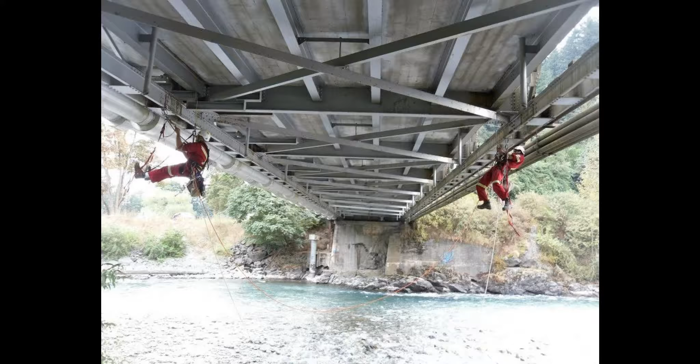Here's a picture of that's quintessential us at work. This bridge doesn't exist anymore. We inspected it and said it's so bad you need to get rid of it.

As an asterisk here, I'm not going to tell you where any of these bridges are. Every single bridge is going to remain anonymous. Obviously some clients would love us to tell you about the projects that went well, and other clients don't want us to tell you about the projects that didn't go well. So you might think you know where this bridge is, but I work in 50 states, 10 provinces, and 3 territories, so don't even try guessing. It is somewhere in North America, and you probably don't know where this is.

But anyways, that's kind of the more challenging bridge that we look at. Before you get to this stage, you start at this stage. I really don't want to spend thousands of dollars on plane tickets and get somebody to fly all the way to New York only to find out they're afraid of heights.

So I can tell you where this is. This is in Richmond. These are all guys, we go down there, and this guy here, he couldn't go any higher than that. And that's fine. That's totally fine. Now is the time for you to find out that you're afraid of heights.

So we get them there. Everyone's, of course, all in the harnesses. We're all ready to go. And if you can get up to that ladder, then you go up to that ladder, and then at the end, you graduate when you walk across that beam. You'll never have to do that in the actual world, but if you could do that fully strapped in, and you can walk across it and feel nice and comfortable, then I know you can climb a bridge.

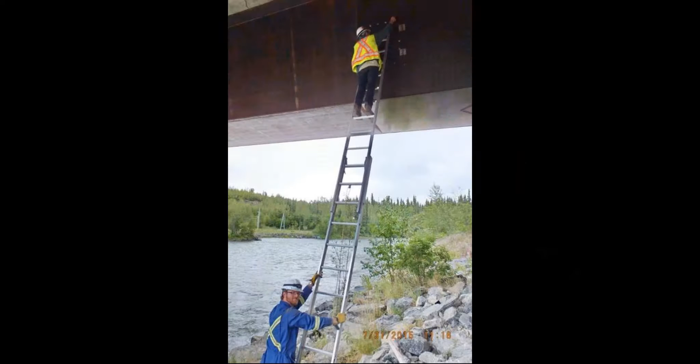So when we take you out to site, here's day one. Again, you have to be very comfortable at the top of the ladder. What's he doing there? He's loosening some bolts. So we're going to loosen the bolts on the trapezoidal box girder, and then we're going to go inside, and then we're going to close the door, and we have a gas meter with us because it's confined space.

We got to make sure we have the proper amount of oxygen with us, and we turn off our headlamps, and we make sure we have multiple flashlights with us, because when the one battery dies, you're not going to be able to find the other battery. And the reason why we turn off the lamps, we close our eyes and wait to adjust, and then we'll see little pinholes of light. Then we can see potentially where the holes are. And then of course we turn the light back on and we look for various different defects inside the box girder.

Now the ultimate graduation of heights, and I like playing this one. Can anyone see where the inspectors are? So we walk all the way along the suspension cable. You wouldn't be doing that - I would not graduate. That's totally fine. So as we're walking along, we're looking for various different defects that we see.

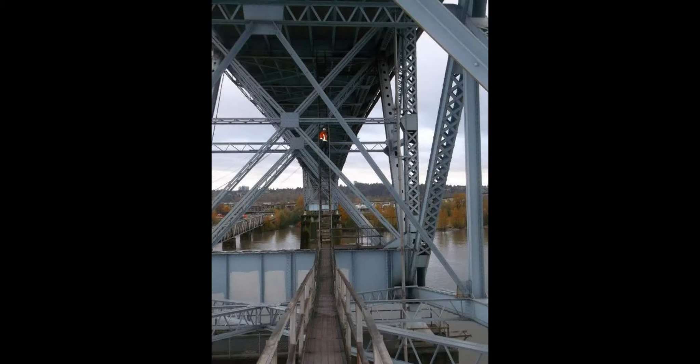This is a bridge here. It looks a little scarier than it is. The ladder I'm on is probably at like a 30-degree angle. It's not straight up and down.

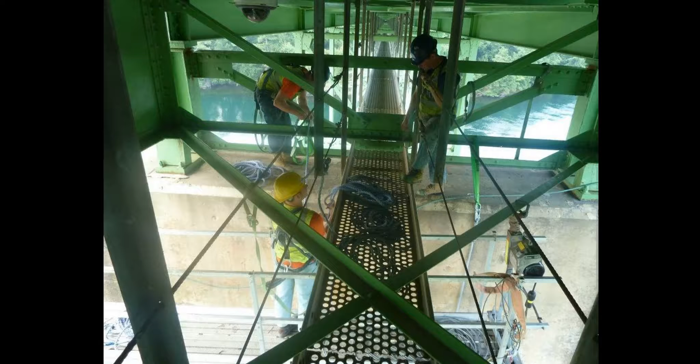And some of them, probably the easiest one is this one here. Some bridges, and it's great, and I say this to all the bridge designers, please put catwalks and actual sidewalks underneath your bridges. That's lovely, because you can walk along this, and it's nice and easy to walk along. Of course, it costs way more money, and in the P3 world, people necessarily don't want to spend more money to help a bridge inspector 20 years from now. But it is really nice when you show up to a bridge and it's basically just walking along a sidewalk.

What they have underneath here, we call this the Spider-Man machine, and there's little winches on either side, and it goes down, and you tighten up, and then it pulls you over, and then it tightens up again, and it keeps pulling you over. So you can kind of Spider-Man your way around the entire bridge.

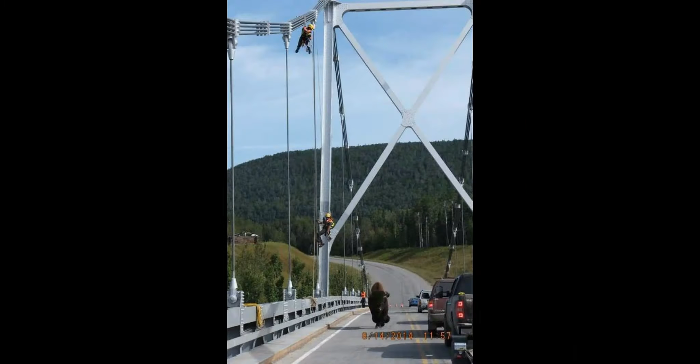So here we are inspecting some of the top cables here, and people normally notice the cables, they look down, and then that's a buffalo.

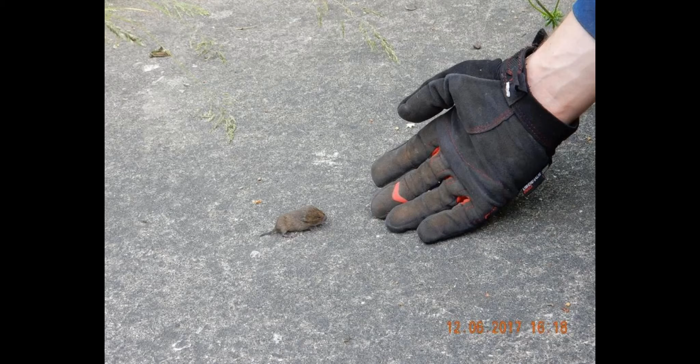I didn't have rattlesnake on my hazard assessment list until this happened. And so yes, we're not only looking up at the bridge, we also have to look down at our feet because there are rattlesnakes where we do inspections.

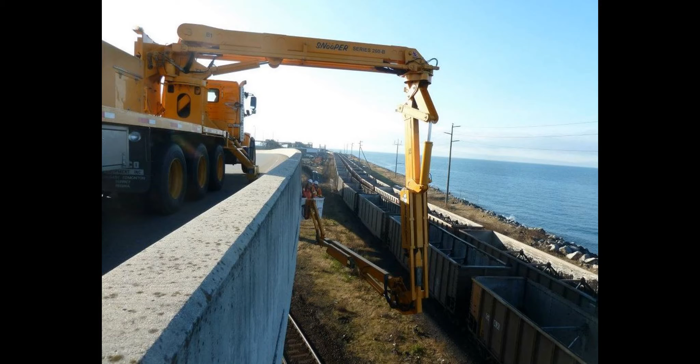The main mode of inspecting, we use this vehicle here. It's called a snooper truck. Snooper trucks are great because they usually only take up one lane of traffic, and then you can go right underneath the bridge. You can do it under active traffic. Here there were active trains moving. There's not a lot of envelope that they take up, so snooper trucks are great.

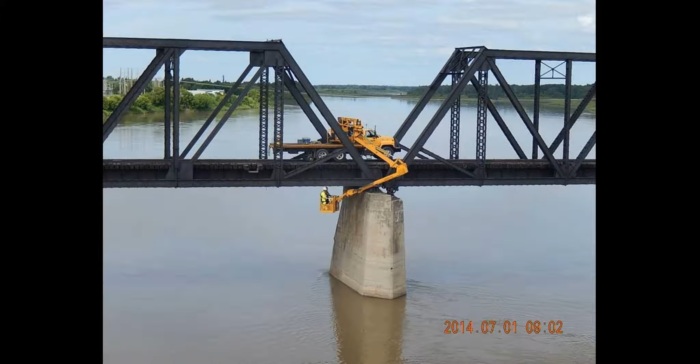There are only a very few of them in North America, so they are kind of hard to rent. You have to rent them well in advance. So there's one of the snooper trucks we use. I only know of one snooper truck that has railway capability, and this is the one that we use when we're inspecting bridges in Manitoba.

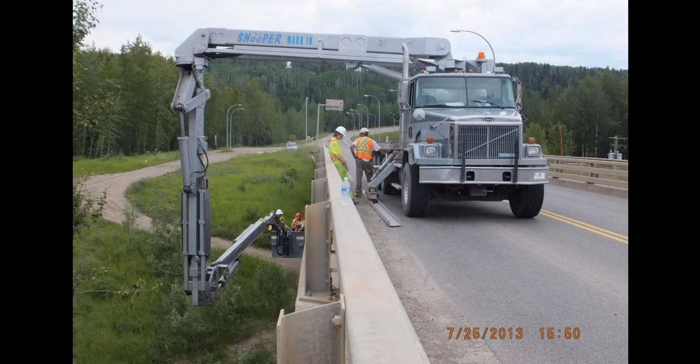And here's a bridge, this is up north, again a bit of a different configuration. Some of them, like you can see, this one has a very small box. The advantage of that is you can get right into a tight little area, but the disadvantage is if you're going back and forth looking at different parts of the pier, that becomes annoying because you have to keep moving the arm. So you kind of have to think ahead about the various constraints and what you're going to be looking for.

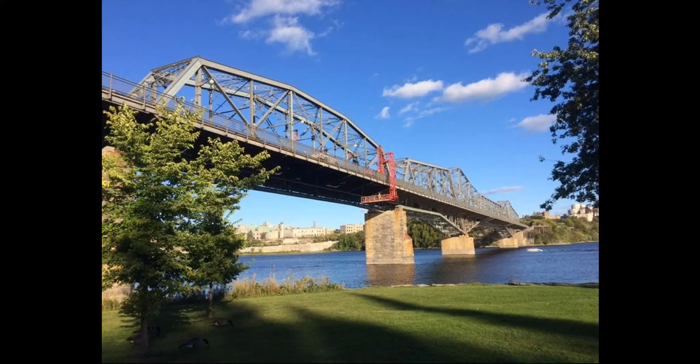So you show this one. This one's in Ottawa, so the Parliament Buildings are right over there, and you might recognize this bridge - Justin Trudeau has done a lot of his photogenic jogs across it, so this is the iconic Alexandra Bridge. For this, you can see the size of our platform there.

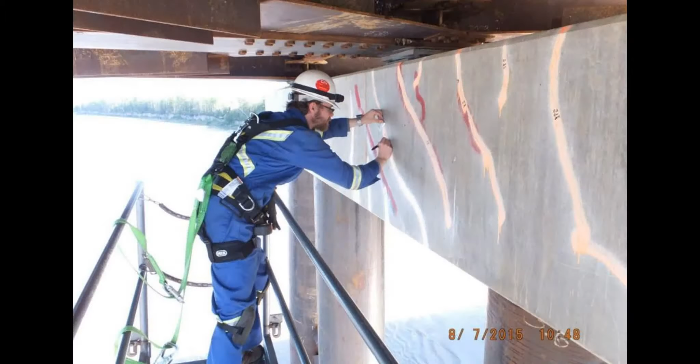So this is back at that same one - concrete related. While we're down there, I am measuring the cracks. So every year I spray paint. We go back to the same bridge, and I spray paint all of the cracks, and if you were to zoom out, you'd see that the cracks in this concrete perfectly match exactly where the cracks should be when you have 4 piers like this and 3 beams like this. It's not the greatest design - I would have 4 piers like that and 4 girders like that, so the force transfer is direct, and because of that we have all these diagonal cracks happening.

So every year I spray paint it again, and then I take out just a little crack gauge, and we're graphing how the cracks are getting larger and larger, and then eventually if the cracks get too big, we'll put a collar on the outside of the hole here.

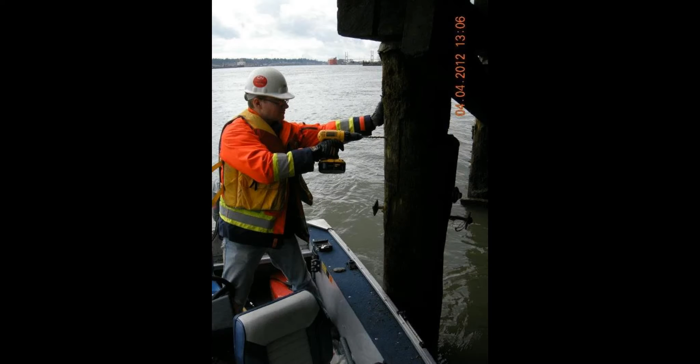We also use boats to get to bridges, so we do lots of timber borehole testing. And if the water is nice and calm, I have a fly fishing tube. So sometimes while I'm at work, I'll be in all my proper PPE, and teenagers will just flow past me in their tubes - exact same type of water situation.

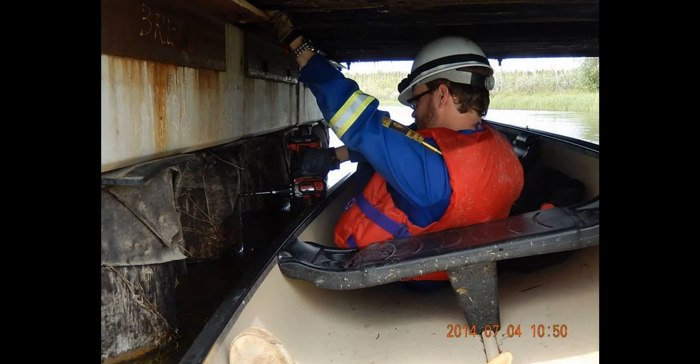When the water is a little bit more rough, here we have a little inflatable raft that we were doing inspections in. When we have to get into low profile areas, here's a canoe. We were doing timber drill testing up in Manitoba on a bunch of railway bridges.

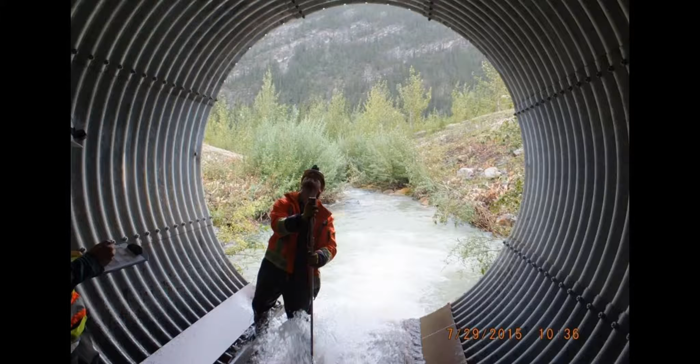We've inspected all of the culverts on the Alaska Highway. So when you're driving, if you ever just suddenly notice a railing and then the railing goes away, if you stopped and looked out and under, there's probably a big, large culvert there. And if you're driving the Alaska Highway, you're probably driving in the summertime - these are usually either completely dry or just a little bit of water coming through them.

But then they have a thing called freshet - so when all of the snow melts, these almost get completely filled. We have to make sure that they are not plugging up, because obviously you could sever the one line that goes up to northern Canada. So it's very important they get inspected every second year by either us or another engineering company, and then on the odd years they get inspected by Public Works as well.

So I went into the outlet, I walked through it, and when I got to the other side, I popped up into his giant compound, and his security guy came over, and he was just blown away, like, this is the best security in Vancouver, how on earth did you get in here? And I said, well, I'm working for the city, and we just crawled through the pipe. So they put a gate on it the next day, because it's a pretty glaring security hole, which is fine. They had to clear it with us because there's a certain spacing of the bars, because you don't want that to plug up, and that would flood his property.

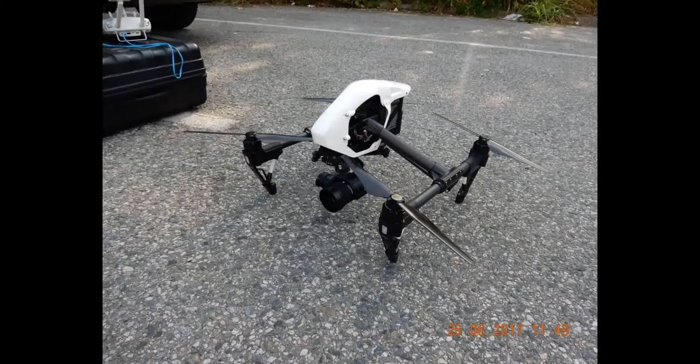We use drones to inspect bridges. This is in the Port of Vancouver. The port doesn't want to shut down anything for a man lift, or shut down the railway tracks, but with a drone you can get right up there and look right in the bearing.

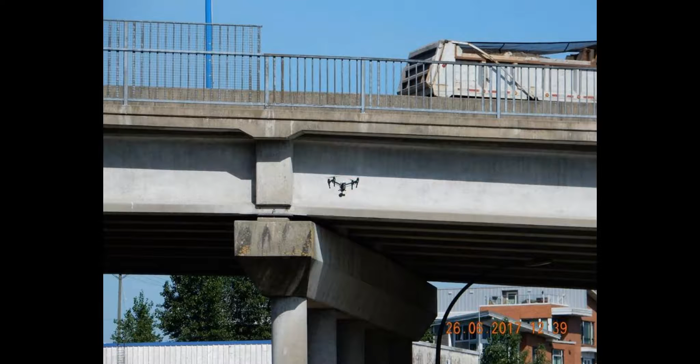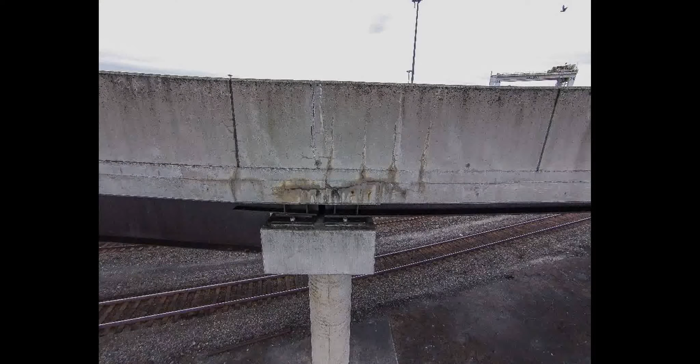This is another job. I can mention the client because this project went well. This is in the port. Again, there's no way we could get that photo. If I zoom out, we're right over top of active trains. You can't even get a man in there. We looked at the midway joint here, and the drawings didn't make sense until we started to see this joint.

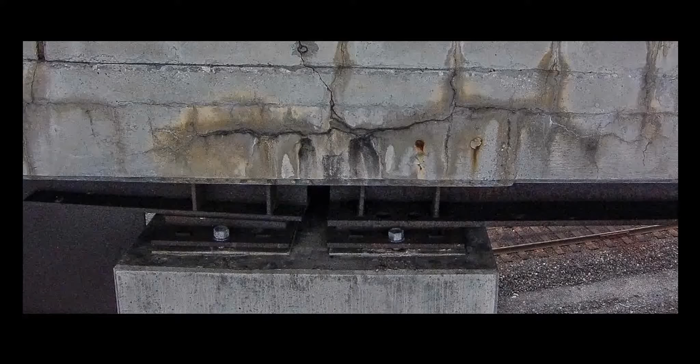This was a job Malcolm was working on. As we zoomed in, because we have a good 4K camera, it was a lot more evident where things were breaking, and it totally made sense to the designers about how we were going to fix this. I think we ended up putting in a link slab.

So I don't look at my job as a bridge designer. I look at my job as a bridge inspector. I'm taking the photos, giving them to Matthias, giving them to the designers. They sometimes say go back, take more photos. But they were super happy with this photo, and I said, great, I'm a glorified photographer. If you guys are happy with the photos I took, I'm happy.

This was a job down in Delta, where basically this retaining wall was falling into the stairway. From a constructability point of view, I put this in. How do you drill in? How do you get your drill rig in here when the sidewalk is only a few feet wide and it's all on a big angle?

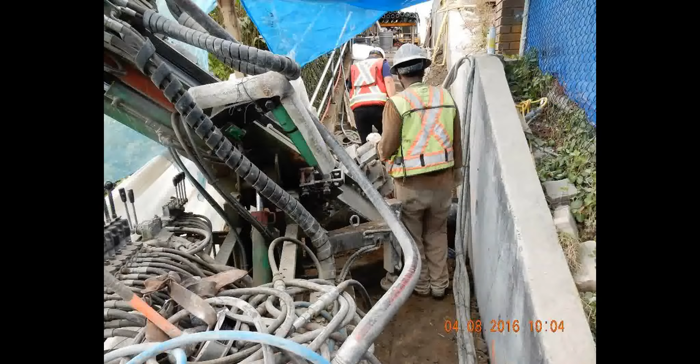I kind of hate to give away secrets to our competitors, but it's okay, I'm okay with doing that. Basically we did kind of an Egyptian style - took a bunch of blocks of styrofoam, which only weighs a few pounds, and put it on the various different stairs to create a flat platform. We got our full drill rig perfectly right in there in order to drill in all of our anchors.

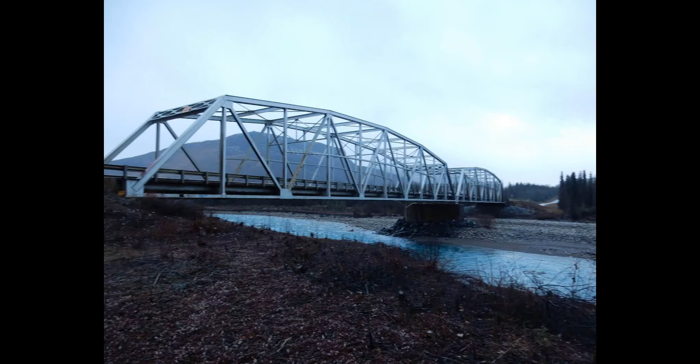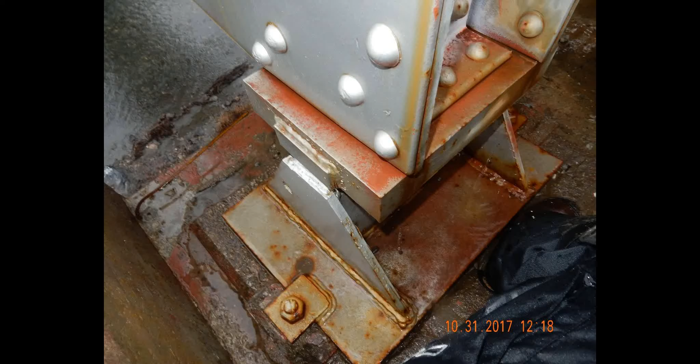How do I explain this? The bearings - this is the bearing, so let's go back to the bridge. Here's the bearing, and this is the end post that comes down, and the bearing. Here's the I-beam, and the bearing is pinching the inside of the web. So as the bridge is moving back and forth, it's basically just ripping the web right out of the I-beam.

I'll show that on a different angle here. You can understand, they didn't fix it to the flanges, they fixed it to the web. When I came in and showed this to the client, I actually took a piece of paper and got them to pinch the middle, and it just rips. So obviously you're going to have a crack right there.

And we tracked those cracks for a number of years, and we saw that they were continuing to develop more and more, and eventually it'll just completely rip the web right out, and then the bridge will fall down 2 feet. It won't be a catastrophic collapse of the whole bridge, but it will certainly shut the Alaska Highway down if you suddenly have a 2-foot drop on your bridge.

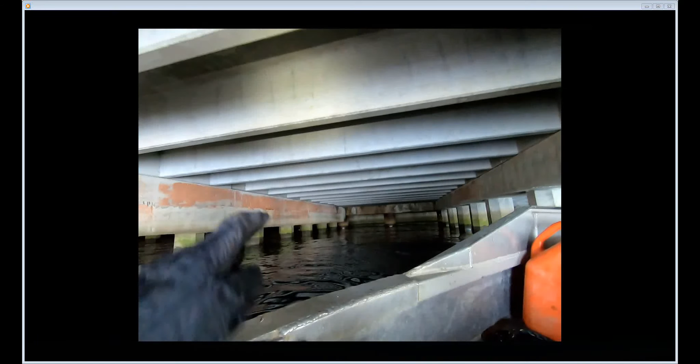So I start with this video. I'll play it a couple times. All these videos are quick videos. This kind of shows you what good looks like. So there's a good idea that if you want to know what bad looks like, you need to see good a few times. So I'm going to show it once.

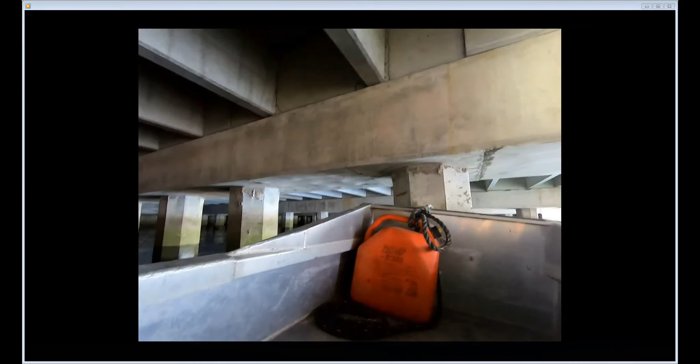Okay, show it again. You know, obviously you can see where the formwork was. You can see the water lines. There's a couple cracks here and there. Okay, so that is okay.

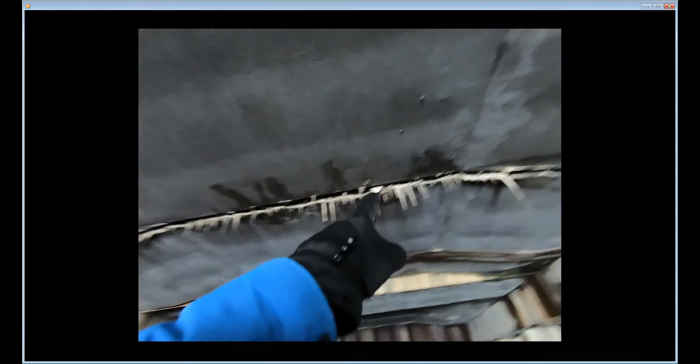So now let's see the very next, and this is only a few feet away. This is the exact same structure, only just a few bays away. It was built by a different contractor. So really a lot of it just comes down to poor workmanship. The first thing I noticed, they left a lot of their formwork right on site. They didn't even clean up their actual work. And then all of the joints are also leaking, and all of the joints here are leaking as well.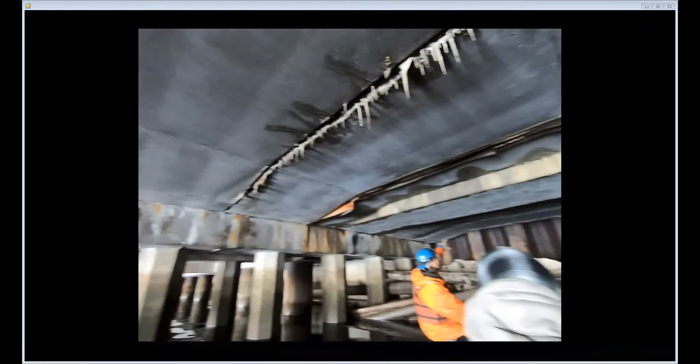And this was the first bay. We had about 40 bays to look at. And so this is the end beam, and you can see there's just a lot of rust staining coming down at all the end beams. So if you see a problem, there's a pretty good chance that there's a much deeper problem buried somewhere inside that structure. So this started to get me a little bit concerned.

Okay, this is just the first one. Like, how much worse does this get? So I'll show you what happened in this next one. So we went to the next bay.

Kind of hard to see in the video, but the corrosion here, this is supposed to be a flat face, but it's eaten it away by about 1 inch. And we're starting to actually expose some of the rebar here as well. So again, my job is to find the problems. I'm not afraid of heights, I'm not afraid of crawling through bird poop. I mean, my job is to find the problem, measure the problem, hand it off to Matthias and his team, and then they tell us how bad this necessarily is.

So I do all the measurements here, and then we have load raters and various different designers who can then say, well, the factor of safety, it was way over designed, so I think we're okay. Sometimes that doesn't happen. Sometimes they say it was designed right at the line, and you've had some deterioration, so we need to potentially shut this structure down. So this obviously was raising quite a lot of alarm bells for me.

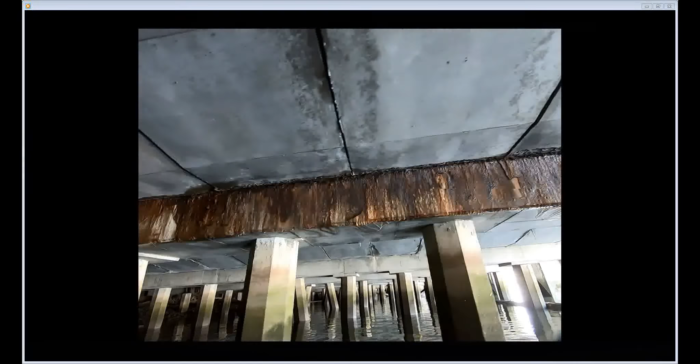And another thing, you can notice here how bad it is, and then you look into the other bay, and it's not as bad. So what's the root cause here? Well, there's a joint in the structure here. There's a joint here, and there's no joint here. And a lot of times, Matthias introduces me as the guy who teaches us what not to do, which is kind of seen as an insult, but that's not what he means as an insult. He means I see what designers shouldn't be doing.

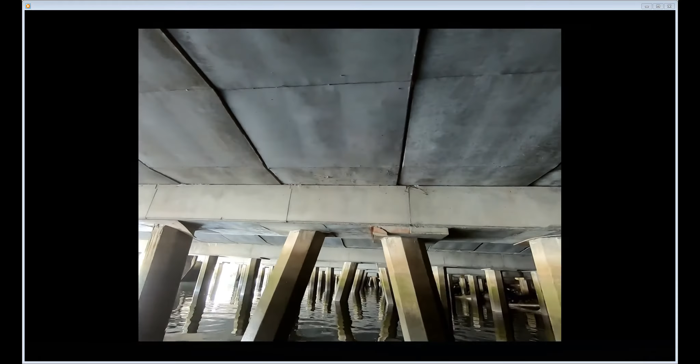So I go back to the office and I say, guys, figure out your joints. You need to do joints properly because water absolutely kills concrete. It's so terrible for concrete. You need to get the designers on board to make sure we're flushing water away from the structure. There's no joint here, and that looks fine. There's some formwork that I left in. And there's a joint here, which hasn't been dealt with properly. And you can see, this is the external deterioration. We don't know what's going on inside where that water might be pooling up.

So as I got to the end of the bend here, I had 60 or 70 or so to go through, and I was starting to get a little complacent because they all started to look the same. And that's a problem with inspectors. We need to make sure we do a thorough job and don't get tired at the end of the day.

I started to notice something right here, and I thought, you know what, I need to get out of my boat. So I got out, and we always wear gum boots so we can get our feet dirty and wet.

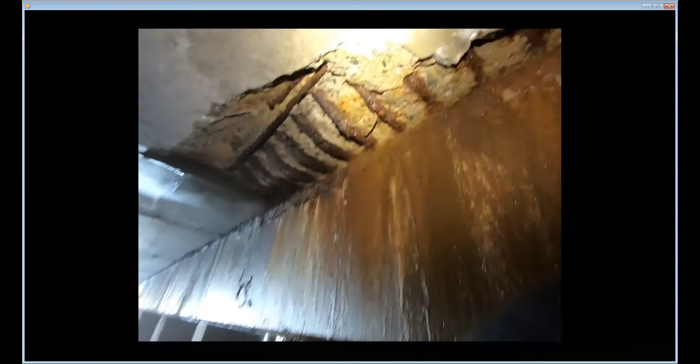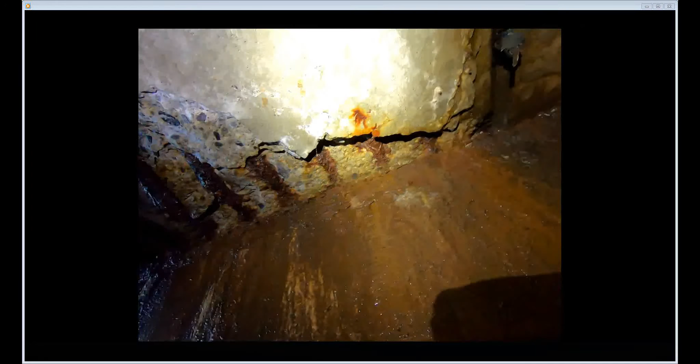So here I am standing on the shore, and this is the main load carrying beam of the bridge, the crane above us. These rebars are supposed to be straight and supposed to be in concrete. We looked at the design drawings and counted, and every single one—like that's the best one you got right there, and obviously even that one's completely debonded, and they're not supposed to be bent like that. You look right in there, and you can see shear is highest right at the end, and this is shear popping it right out, bending all the rebars right up.

So, okay, how's the other side looking? Because when there's pop on one side, how's the other side? The other side looks okay, but if the problem's happening there, the problem might be happening on the other side as well.

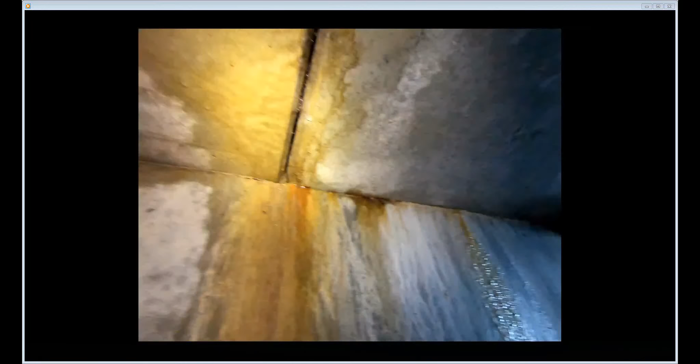Pause it right there, yeah, right about there. So this was a situation where we shut it down. We told the client, you cannot safely operate on this. We've done our calculations where even in new condition, you probably shouldn't be operating these larger capacity cranes. So that is an interesting battle there, but as far as we know, they've shut it down. As far as we know.

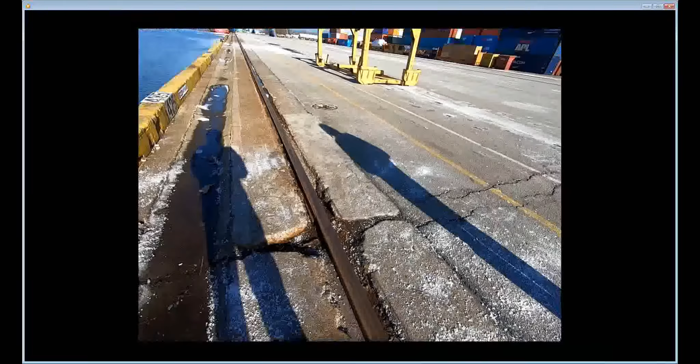So the root of the problem here—what's all the white stuff on the ground? It's salt. Salt is terrible for concrete. And here's the joint, or lack thereof, of a joint. So again, we say to designers, when you're designing a joint, actually design a joint, because the force is going to find a way. It's somehow going to find a way. It's broken the asphalt, the water's still going through, and it's still eating away at the bridge, at the structure.

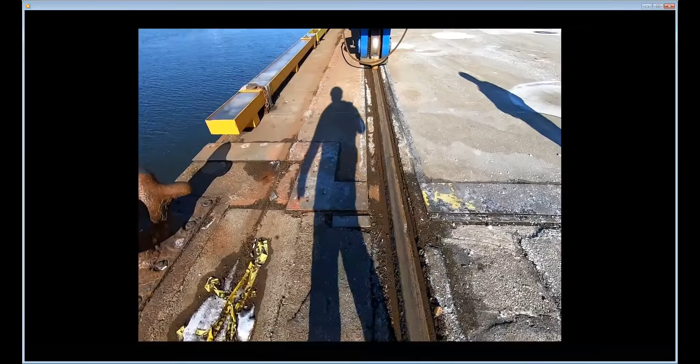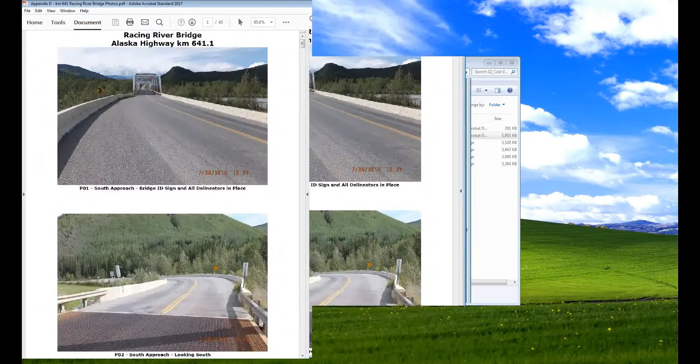Perfect, right on time here. So this is the same bridge that we saw before. Let's scroll through some of the photos just so you're familiar with the bridge. It was a truss bridge up on the Alaska Highway.

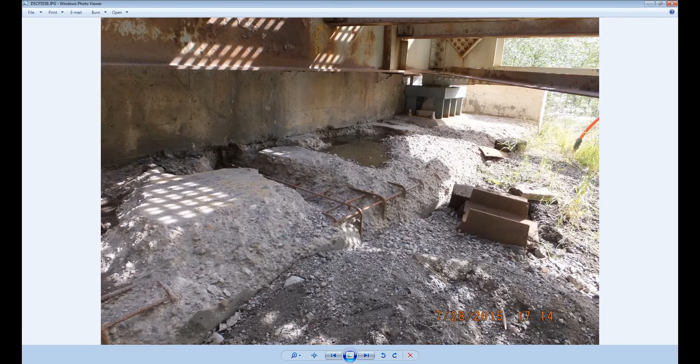And so here's a deck, a grated deck. So where does the water go? Where does the salt go? Where does the snow go? It goes right through the deck. And what happens is to the abutments—the concrete has spalled away about 8 inches, and we're down to the 3rd layer of rebar.

So this whole thing just gets completely covered in gravel, and the gravel holds in all the moisture. Again, I always say to people doing maintenance on a bridge, clear the gravel away from a bridge, because the gravel holds all the moisture, it holds all the salt, it holds all the sand, and it completely eats right away.

Happy to say this has been completely fixed. We were fixing it just a couple weeks ago, and this is the same bridge where we were fixing and swapping out the bearings.

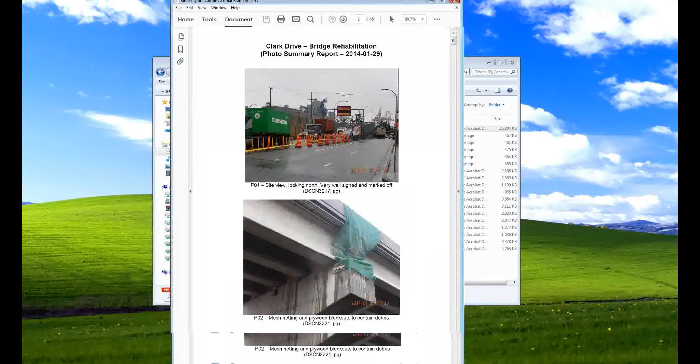Here's a joint repair I want to show you. The client was the Port of Vancouver, and they were quite happy with how this one went.

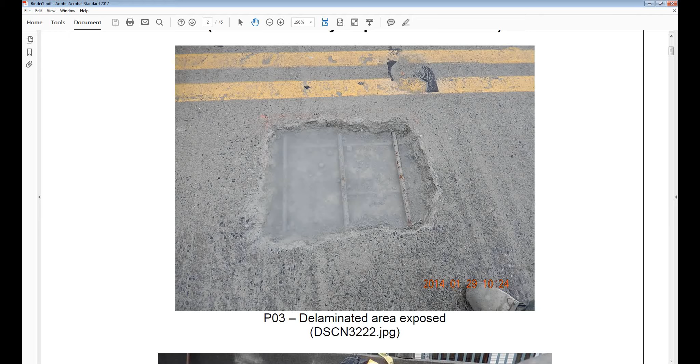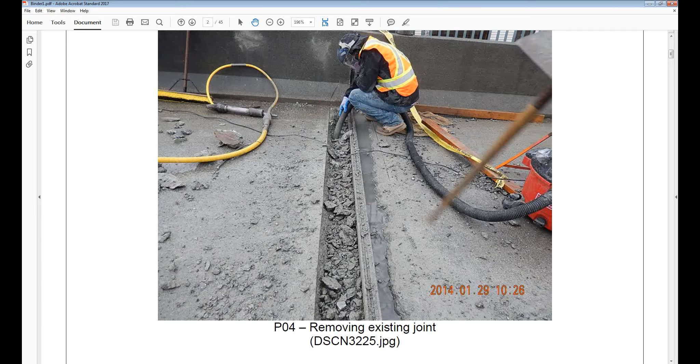We're probably all familiar with concrete delam. A lesson learned here: make sure you don't just jackhammer out the area of delam, go quite a bit beyond it. We did this job back in 2014 and had to do it again because we didn't go far enough out, so that's kind of on us. We needed to go a little bit more. Also, delam patches a lot of times don't work so well, and they don't necessarily have the same life expectancy as fresh concrete.

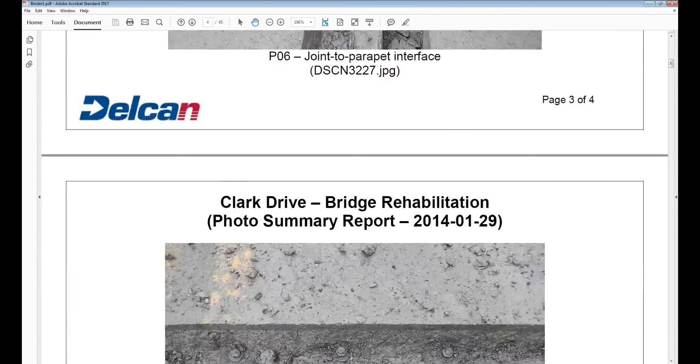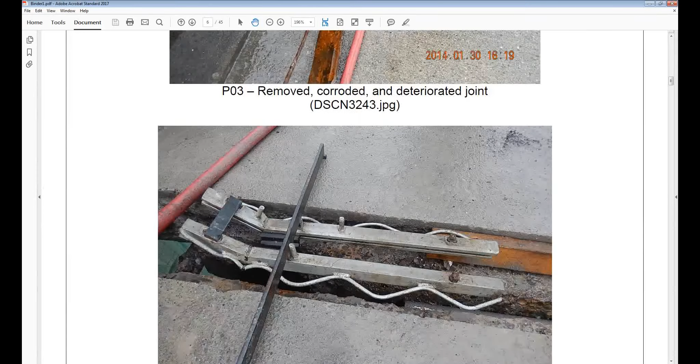The job here wasn't so much the delam patches, it was the joints. The joints were leaking and deteriorating the girders underneath. So we jackhammered out and pulled out the old expansion joint, cleaned it all out, and removed everything from the joint.

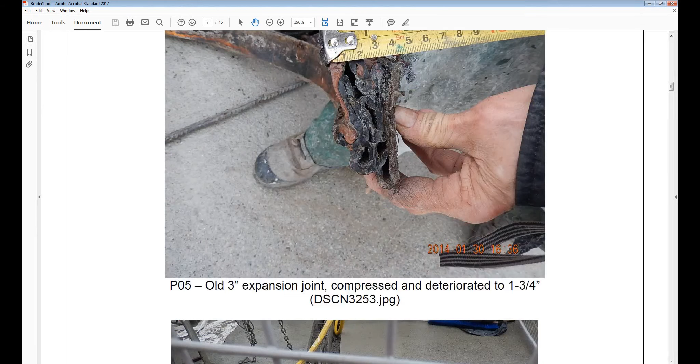Some of the old joints we were breaking out, and here's the new joint we were putting in. It's a sinusoidal bar, and we were going to put in a product I highly recommend called Wabocrete. There's an example of the old joint, which was all destroyed.

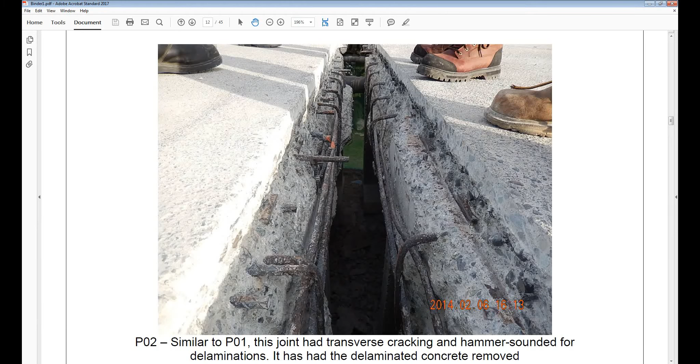Some other site photos here. We started forming up where we were going to put in the new joint. Again, here's an issue where the concrete was starting to deteriorate, so go back a number of inches past the actual point of deterioration and clean it all out.

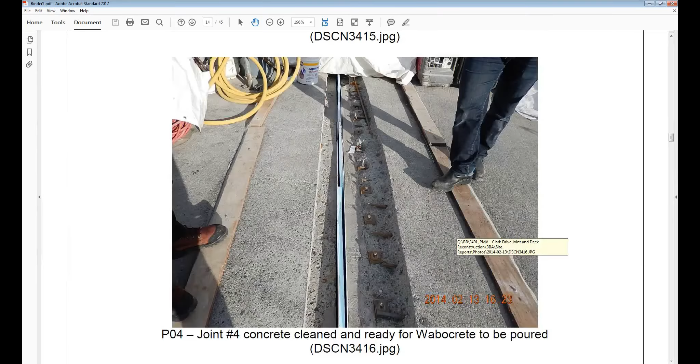The rebar that we exposed chipping away the concrete was not normally deformed, it was just smooth bar, so we had to put in new rebar. There's some more rebar exposed, and it started to form up in the middle.

Some more forms on it, and then we put in some of the new rebar. We start putting in patching material down on the bottom.

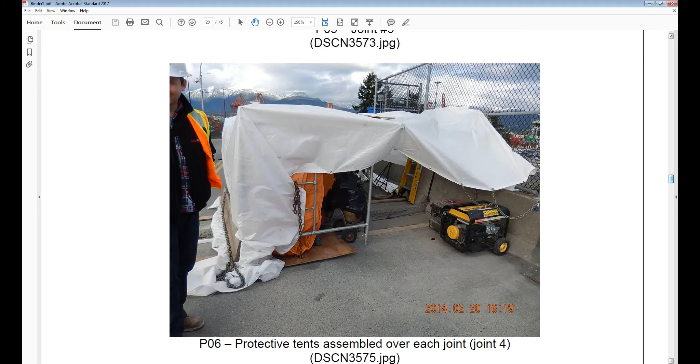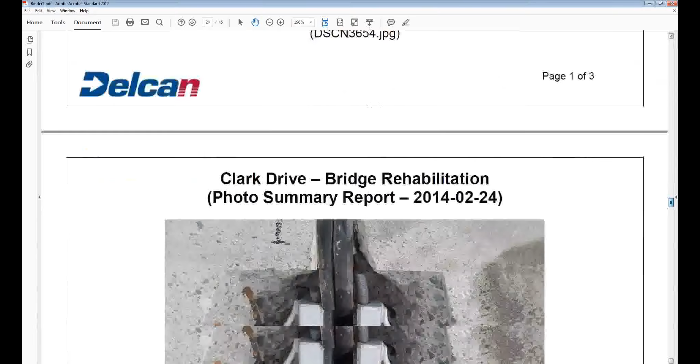Heating and hoarding, protective tents - it's always great to work when it's not raining and when you don't have the wind blowing against you. It's also a lot nicer for the contractors, they stay nice and warm, so a happy contractor is a productive contractor. I really recommend putting in the specs to make sure you put a little tent around the areas you're fixing. Then as we got towards the end, we started to pour.

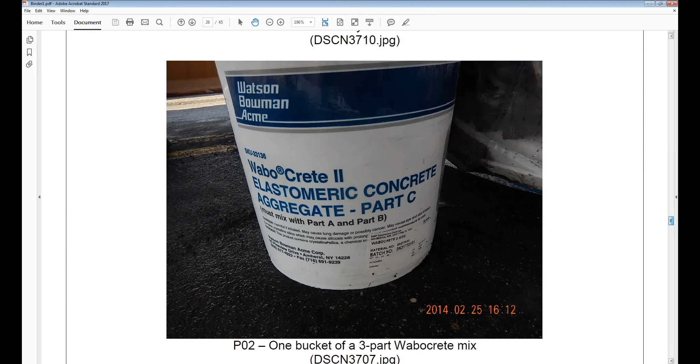There's the sinusoidal anchors, the tents, and there it is fully formed up with the bars. I really recommend this product, Watson Bowman Acme, Wabo Crete II - a really good product to use.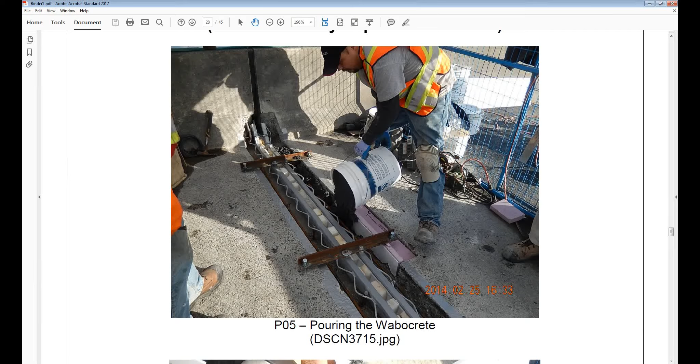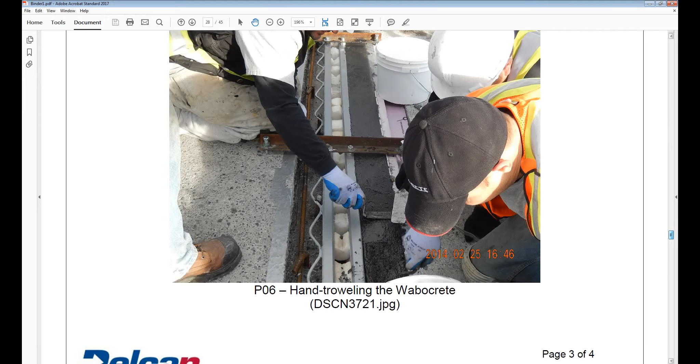It's kind of a multi-step process, you mix it in with these different pellets, and then it pours basically. The only bad thing about it is the bridge was on an angle, and the Wabocrete kept slowly falling down, so we had to get guys with trowels every couple minutes to push it back up, but that's okay - if that's all it takes. It's a great product, it sets up in a couple hours.

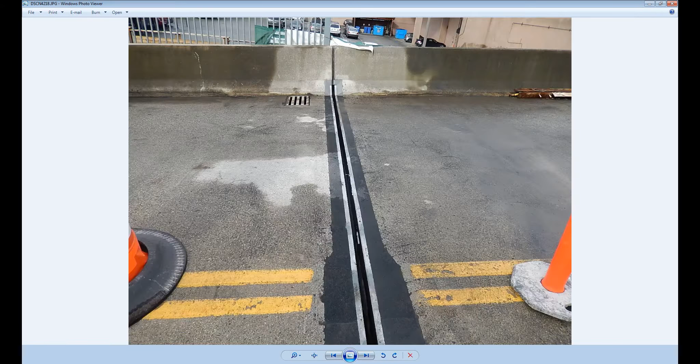That's kind of what the finished joint looks like. I'll snap to the photos here - I believe this is the final product. So it creates a nice look, it almost has an asphalt type look.

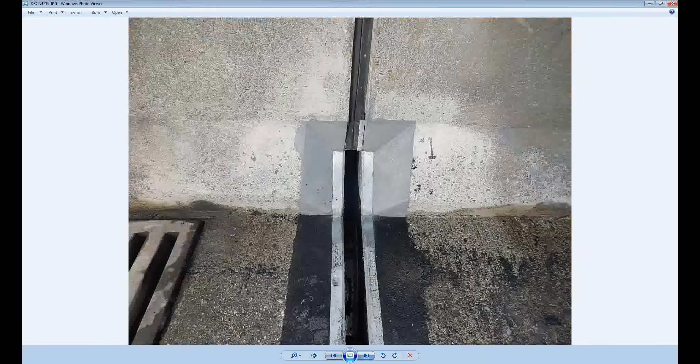Again, we wanted to think about drainage, think about relief here, think about how we're getting the water away from the joint. These are the patches that we finished, and these are also some patches that we did to the girder underneath.

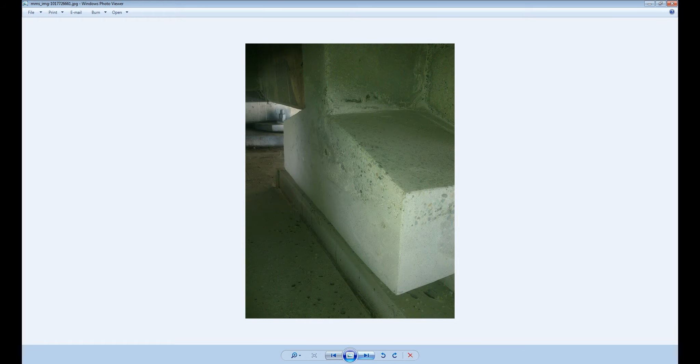We hilted in some anchor bolts to then put on these patches so they had something to adhere to. A lot of times I see patches that don't have anchors like this, and so when you put on your patch it just snaps right off.

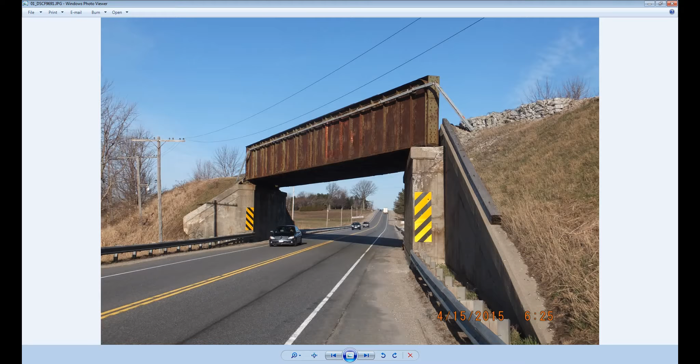I think we have just 2 more minutes here, so I want to think about the best one to show you. I want to show you this one - yeah, so I have 2 folders here, fixed and original. So original.

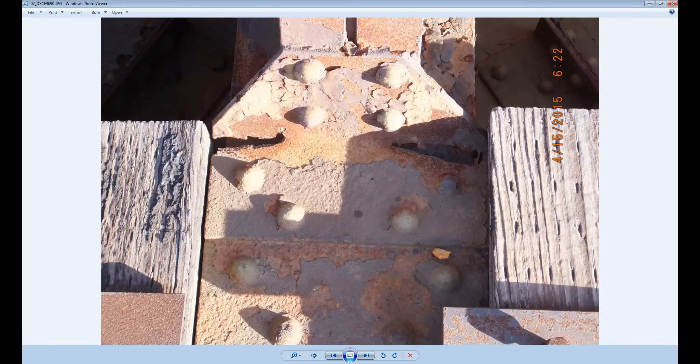Yeah, this is a train bridge. At first glance it looks okay, bit of a hump on the approach there. Again, nothing's really jumping out to me. Okay, concrete showing its age - I mean, it's 1936.

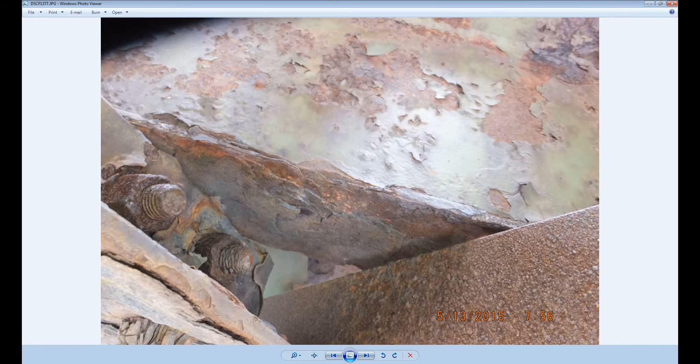Okay, that looks pretty rusty. Start to see cracks in the steel - if you see one crack in one place, you're going to see one some other place as well. So we're losing all the heads of our rivets here, and you see we even have a hole in the web. So if we have a hole in the web, that doesn't mean the web right here is full thickness - obviously it's knife edged right down to a hole.

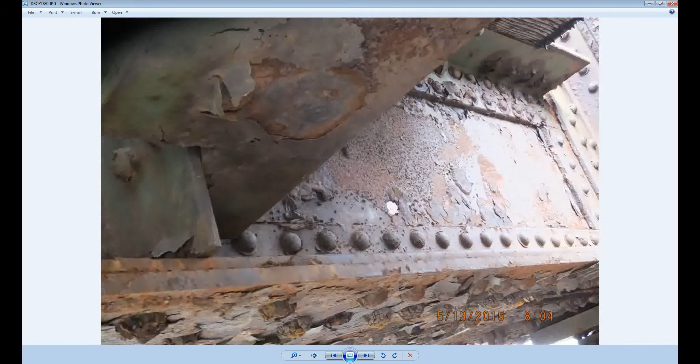Okay, we see more knife edging. It's really hard to measure with calipers the thickness of that, so I spend a lot of time up there with a wire brush.

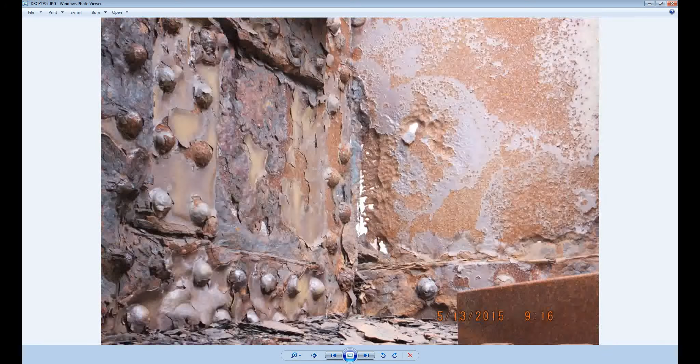More holes in the web. I'm starting to get a little bit more concerned. Now we have holes and perforations right along the web, getting worse, more holes. Right along, all the rivet heads are gone. This is the main girder, and you can see it's perforated right along here. More holes, more holes. That web doesn't have much left. Neither does that one.

This is a hole, now I'll show you at a different angle. That's the same place, so this is the main beam. There's no redundancy in this system. If that goes, the bridge falls down. There's no redundancy. And if you do your calculations and your section modulus, you've got a top flange, a bottom flange, and then you've got nothing. So from a math point of view, this doesn't even stand up. Obviously it is still standing up. So basically the load finds a way somehow, but this bridge should be shut down.

So we did, we shut this bridge down. We said you cannot run VIA Rail passenger trains at 70 miles an hour, which is what they were trying to do with that. So the emergency got some fixes going, and I will show you the fixes.

So you can see we replaced all the floor beams, or at least the worst floor beams. I mean, some of them might have been rusty, but not in horrible shape. You can see some of the floor beams over here were replaced. More floor beams, more floor beams. The web all in here, you can see the brand new bolts. We looked at every single stringer and which ones should be fixed, which ones shouldn't be fixed. We replaced the bearings, and that kind of overall shows what we did.

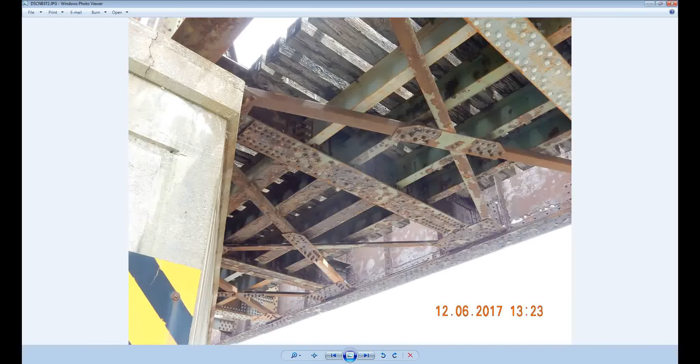Lots of gusset plate fixes, lots of cross bracing replacements, and that worst picture that I showed you was right here, so we totally ripped out everything. We did it over the course of a weekend, and didn't have to shut down the highway traffic - we shut down the train traffic. We had single lane alternating, and we were able to get VIA Rail going the next Monday. There's still problems on the bridge, so I still go back there on a regular basis, but it's certainly a lot better. So that's my 45 minutes.

I don't like it when presenters go over their time. Does anyone have any questions?

So Pat, what's the message there - build with concrete? The main message is get water away from your bridge. That's the main thing. So you see the concrete problems, and then you see the steel problems are really terrible as well. So I always really try to stress water is absolutely terrible, and I give these presentations to all our designers - you really never want to have water near your bridge.

So when you're hiring people based on their fear of heights, do you find that people either have it or don't, or can you build up your tolerance to that? I normally ask people if they ski, and if someone says they do the extreme runs or something like Spanky's ladder, then I kind of get that, yeah, you're gonna be okay. Even if you're afraid of heights, there's less of the going-up-to-heights jobs that we do - certainly you can inspect a bridge and not necessarily have to be at those crazy heights. But it is good to kind of figure that out a little bit before you get hired.

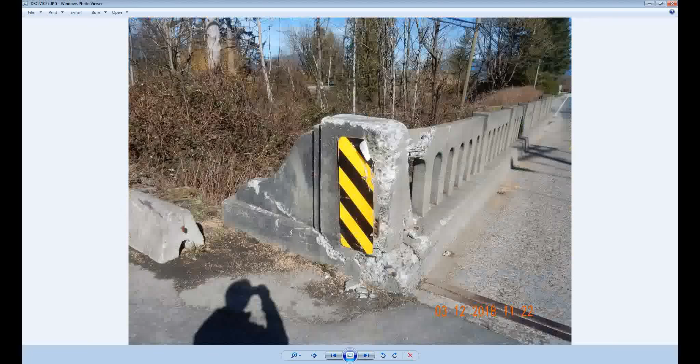I'll end with one fun one here. This is impact damage, in Chilliwack, where a truck drove right into the barrier. The truck was carrying grain. That's exactly what the barrier was designed for. Yeah, so it did exactly what it was supposed to do.

How do you find a grain truck driver when he hits something? Follow the trail of breadcrumbs. We followed him for two kilometers, and he was in the middle of a farmer's field saying, 'Wasn't me, man, totally wasn't me.'

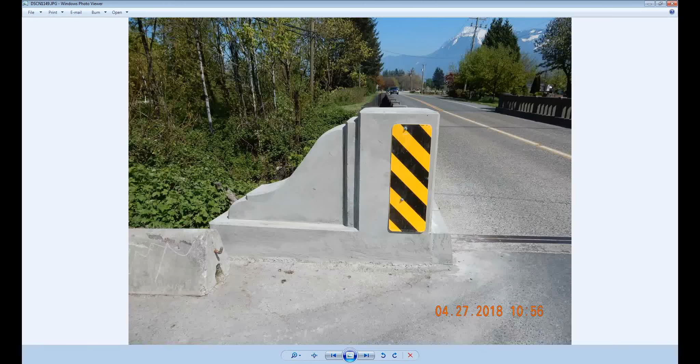So that's what it looked like. We did a quick design, and then the final version — I think within 24 hours, that was the fixed version. And we even cleaned up most of the grain. Thank you very much.

So thank you, I really, really enjoyed that. That was a very well done presentation, so thank you very much.